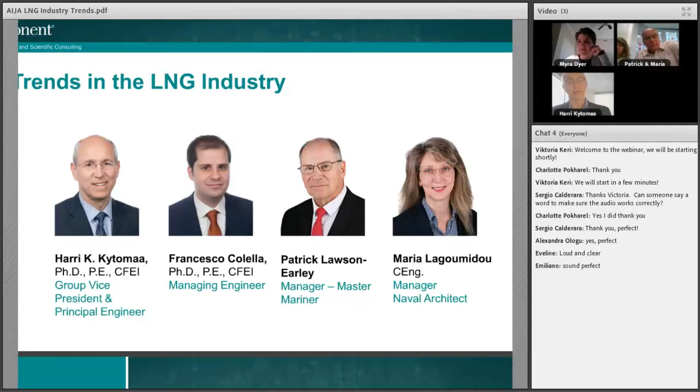So my name is Harri Kytomaa, as you heard, and I'll be kicking this off, and then Patrick and Maria will be speaking just after me. So again, thank you to AIJA for hosting us today and allowing us to give this presentation. And what I'll be talking about really is the rather exciting activity that's going on globally with liquefied natural gas.

So to kick us off, let me just address a simple question as to what liquefied natural gas is. So natural gas is typically 85% methane. It has higher molecular weight constituents like ethane and so on. It's produced either directly from gas reservoirs or as an associated gas in the normal production of crude oil. So when crude oil is produced, there is also natural gas dissolved in it that is a byproduct of crude oil production. So methane is CH4. That's the molecular structure of methane.

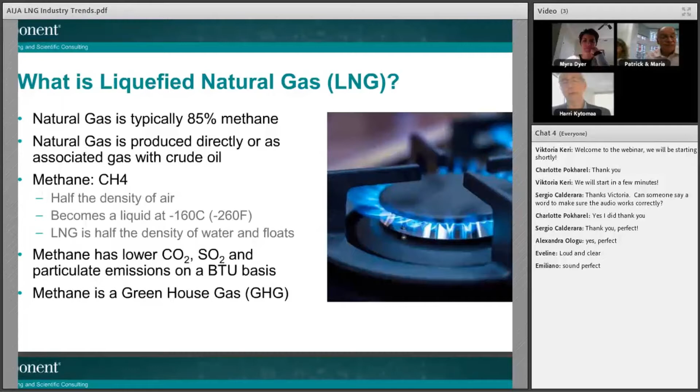Under normal conditions in the atmosphere, it has half the density of air, and it becomes a liquid at a temperature of minus 160 degrees Celsius or minus 260 Fahrenheit. As a liquid, it's about half the density of water. So if you spill LNG on water, it'll float on water. And that's relevant from the standpoint of safety issues that one has to be concerned with.

One of the great benefits, and that's really driving a lot of what's going on in the world, is that methane puts out on a per energy basis much less carbon dioxide, approximately half, for example, of what coal would put out, and also doesn't emit any sulfur dioxide, nor does it emit particulate materials when it is burned. So these environmental advantages have been driving very strongly what's going on in China, and we'll get into that a little bit more. But specifically, there's a big push in the last 3 years under the Chinese Blue Sky Initiative to replace the combustion of coal with the combustion of natural gas.

But methane itself is actually a potent greenhouse gas. It's about 20 to 30 times more potent than carbon dioxide. And so when it is vented into the atmosphere, it's a problem.

So the industry, while there are a great many environmental benefits associated with methane that I just described, venting or fugitive emissions associated with methane is going to be a great area of focus from a standpoint of ensuring, let's say, the environmental friendliness of the use of methane.

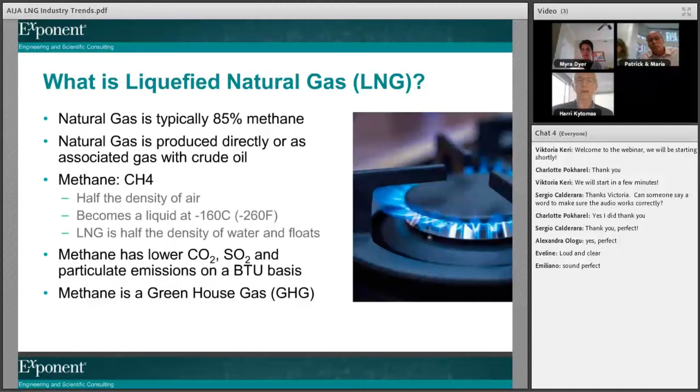So, what does the infrastructure look like? The natural gas is produced either on land or offshore. So you can see in the far right an onshore production rig, as well as here, if you can see my cursor, an offshore production platform.

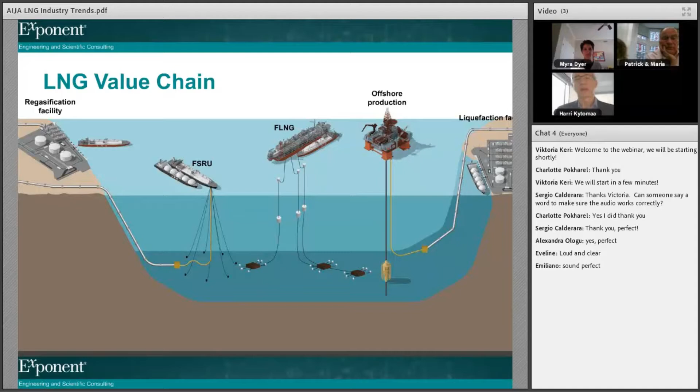The gas is produced, and then using pipelines, it is sent to a gas treatment facility. The gas treatment facility removes hydrogen sulfides, water, as well as natural gas liquids like ethane, propane, butane, and so on. And once the gas has been treated, it goes to a liquefaction facility that you see over here.

The liquefaction facility is really a large refrigeration plant. I'll go into some detail about that a little bit later. The liquefied natural gas is produced as a liquid, it's stored in tanks, and then offloaded onto ships, and the ships go off to market, like, for example, to the regasification facility in the far left over here.

Other exciting things are happening in the industry. In fact, for the first time in 2019, we now have what are known as floating LNG or FPSO, floating production, storage, and offloading facilities, like the very large structure that you see over here. And these are, as the name suggests, floating facilities that do everything that an onshore facility does, but offshore, to monetize stranded resources offshore.

And the way an FLNG facility operates is a ship will come to the side of it and then transfer the LNG over to the ship, and the ship will go off to market. And so the production of LNG is done with these FLNG systems, very complex systems that are now emerging in the marketplace.

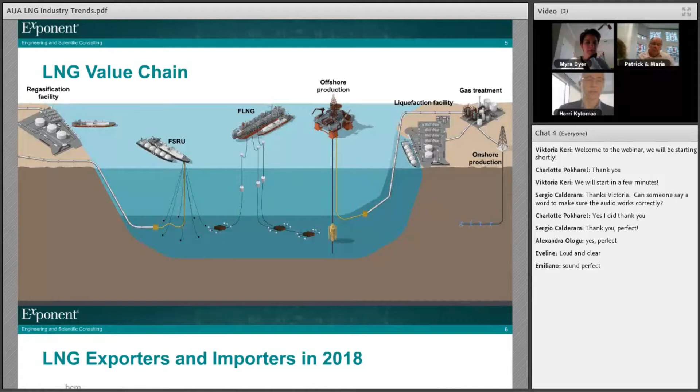There are also floating storage and regas units, and these have been around actually for a good 15 years. What these are is facilities, ships typically, that will store LNG and allow the regasification of the LNG so that it can be introduced into the network of gas pipelines at the market end of things. And so you can see here the FSRU is connected to a pipeline that then delivers gas in the far left of this image.

So where is all of this going on? This is really a good graphic that summarizes the global situation today. The top 10 LNG exporters on the left rectangle in 2018 were Qatar and Australia. Now, what's interesting about this picture is that there's enormous activity right now in the United States and Russia. So what you're seeing really is a window into 2018. 2019 and the next few years ahead of us will actually begin to develop a different picture.

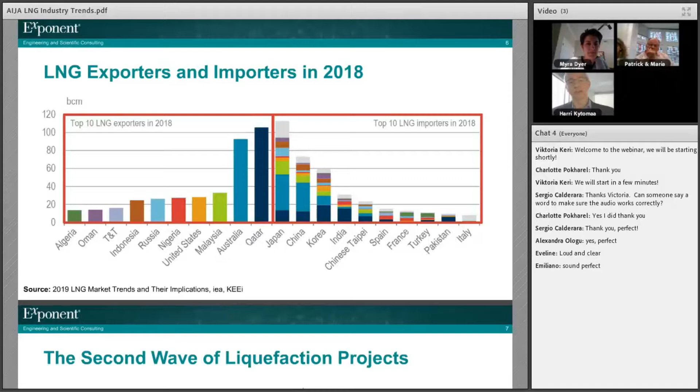The demand for LNG, or who is importing the LNG, in short, is Asia. You can see here Japan, China, and Korea. The interesting picture associated with the import of LNG is that China is becoming a big player and only just recently overcame Korea. Korea is now in third place in 2018 as an importer. And what's going on in China and the aggressive development of the import infrastructure is really going to continue to change this picture, as you'll see.

So if you look at liquefaction projects, these are the export projects, and who is doing what, I'll focus your attention first on the right-hand side. You can see that there are really two major peaks. This slide on the right shows you the export capacity that's coming online by year. And you can see that in the first peak over here, you have the light blue, so there's Qatar.

So essentially in the first decade of this millennium, Qatar developed a major infrastructure, and also Africa was coming online in red. Now, in this particular decade, the second decade of this millennium, the big activity that you're seeing is first Australia, then Russia and the US. And so that's what's happening right now.

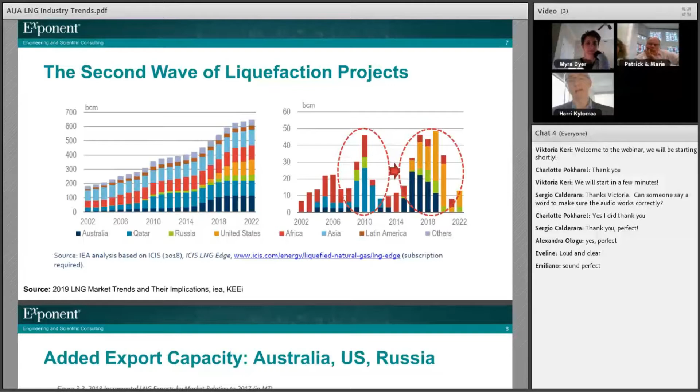So if you look at where we are today, we're in 2019 right here, and you can see that the United States has got a lot of infrastructure coming online this year and next year. I'll show you that. And Australia is at the tail end of its major push in development.

So if you look at the increment in 2018, just the increment in 2018 of the export capacity, you can see that Australia was the one that contributed the most, consistent with the prior chart, and then US and Russia contributed each around 8 million tons per year.

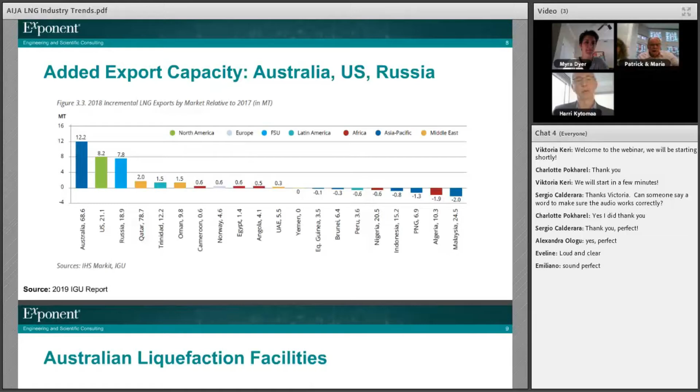Now, where are these facilities? So you can look at geographically where these are situated. So in Australia, here I'm showing all of the liquefaction projects. The two major projects in Australia are the Gorgon Chevron project and the Northwest Shelf, and each of these is around 15 million tons per annum, or MTPA.

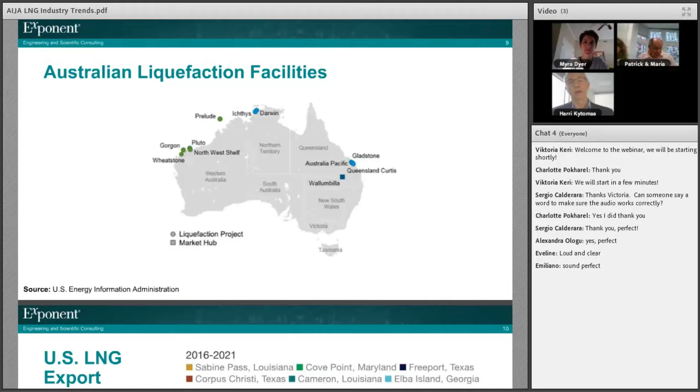Prelude is actually the first floating liquefaction facility, and you see it over here. It came online this summer, delivering its first shipment in June 2019, and there are more FLNG projects on the horizon today.

In the US, the picture is actually really quite interesting. This is, again, the capacity that's come online. And so you can see in 2019, there's a steep rise. First in 2019, we've seen a continuation of the Sabine Pass liquefaction trains. So the fifth one just came online about a year ago. And then you're seeing Corpus Christi, Cameron, Freeport coming online.

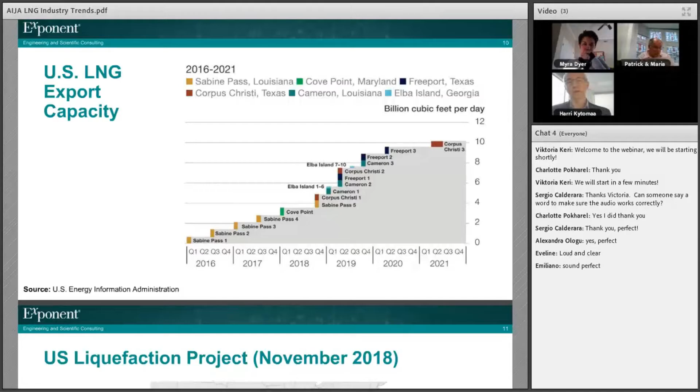And so really the picture that's emerging in the US is twofold. One, big push in 2019. 2020, next year, promises a very large number of projects, up to about 100 million tons per annum, going to final investment decisions, FID, which means that there's a potential for the liquefaction capacity in the US to actually double in the next 5 years or so. But it's a very dynamic marketplace right now, so yet to be seen exactly how that transpires.

Most of the capacity in the US today is in the Gulf of Mexico. You can see here Sabine Pass, Cameron, Freeport, Corpus Christi. There are projects worth mentioning that are developing right now on the West Coast. These are noteworthy because the greatest demand, as you saw, is in China or Asia in general, and the distance from the West Coast to Asia is considerably shorter, about 10 days shorter than from the Gulf of Mexico. I'll say a few words about that in a little bit.

Also noteworthy is the fact that there are about half a dozen projects that make up the opportunity for doubling the North American capacity in the next 5 years or so.

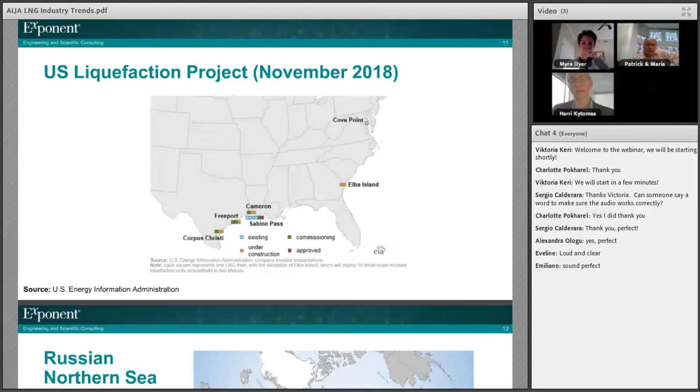Now, Russia is interesting. Yamal LNG has been online now for a couple of years. What's unique about the two developing projects, the Yamal LNG and Arctic LNG II in Russia, is that these are on the Arctic Ocean, and they have required the development of more sophisticated LNG ships, specifically ones that have the ability to operate in ice and the ability to break ice.

As I pointed out, the greatest demand is in Asia. The demand is less in Europe, and so right now the goal for these Russian projects is primarily to sail via the Russian Northern Sea route that you can see here through ice to the Asian market, and in the wintertime to cater to Europe. And economically, the greater demand market actually fetches a higher price. So there's a real drive for the Russian LNG to cater to the Asian market.

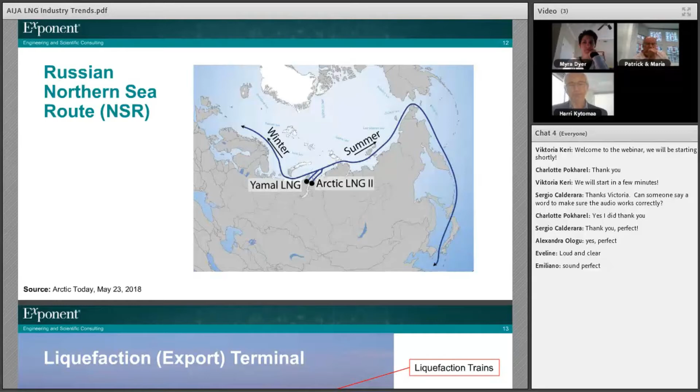So what does a liquefaction facility look like? The liquefaction facility from a technical standpoint is really a thermodynamic cycle that is similar in character to your refrigerator at home. A refrigerator in your home has a compressor that compresses the refrigerant, and that's the piece of equipment that sometimes makes some noise in your fridge. In compressing the refrigerant, the refrigerant is heated up. So the second important function of the refrigerator is to reject heat. In the back of your fridge, you've got these coils that heat up and reject heat into your kitchen.

And so a liquefaction facility has to have a large compression capacity, and that is done using compressors that are driven by gas turbines, or essentially modified aircraft engines. And the typical appearance of a liquefaction facility will reveal that you have a lot of heat exchangers to reject the heat that is created.

The compressed and cooled gases then go through an expansion valve that causes the refrigerant to cool significantly. That then enters a heat exchanger. In your fridge, that's the cold plate on the inside of your fridge, and at a liquefaction facility, that's called the cold box. The cold box is really an important piece of technology associated with liquefaction terminals. The refrigerant then cools the gas, and the gas is brought down to a temperature of around minus 160 degrees Celsius, making it a liquid.

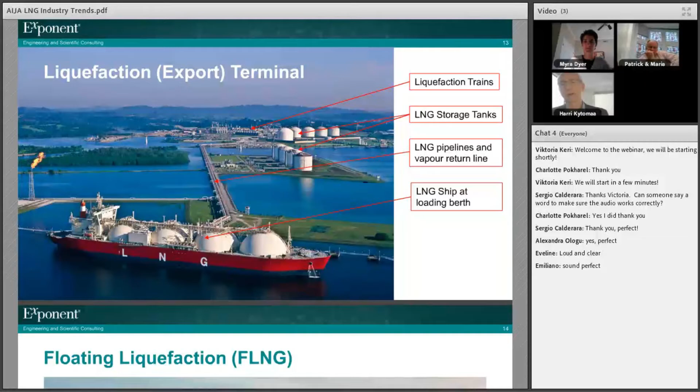Other players in this liquefaction technology include the Prico. That's probably the oldest, and typically supplied by Black & Veatch, as well as the ConocoPhillips optimized cascade process. And so you're seeing those three in the marketplace, and there are new ones that are coming online as the world continues to develop this capacity.

So here is a picture of the Prelude floating liquefaction facility. And what's interesting about the Prelude is that, well, first it's floating, so it operates offshore. And so the processes have to be able to accommodate wave actions and things like this that you do not experience onshore. And in essence, the facility or the platform has to accommodate all of the processes ranging from the production of the gas to treatment all the way to liquefaction in about a quarter of the footprint. So you can imagine a lot of the systems are packed very closely on this very large ship.

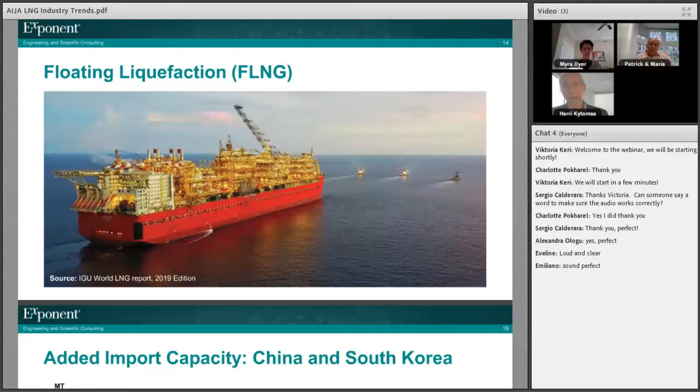The dimension of the ship is about 0.5 kilometer by 75 meters or so. So it's absolutely enormous. And you can expect to see more facilities like this developing in the next 5 to 10 years.

Let me skip to China. So now I'm sort of swinging over to receiving terminals or regasification terminals. So in the last 3 years, there's been an enormous push in China to develop the import infrastructure to receive liquefied natural gas. And the reason for this has been primarily to replace coal that has been a great source of pollution in China with natural gas, with its benefits associated with clean combustion.

The interesting thing about China is that not only are they developing an enormous import infrastructure, but they're also investing in the liquefaction capacity globally. So they have been, for example, minority investors in the Russian projects that I described to you. They are a player in Shell's LNG Canada project, and others, including Australia. So really, China is a major player, and this is helping them secure the LNG supply, not just building the infrastructure to import.

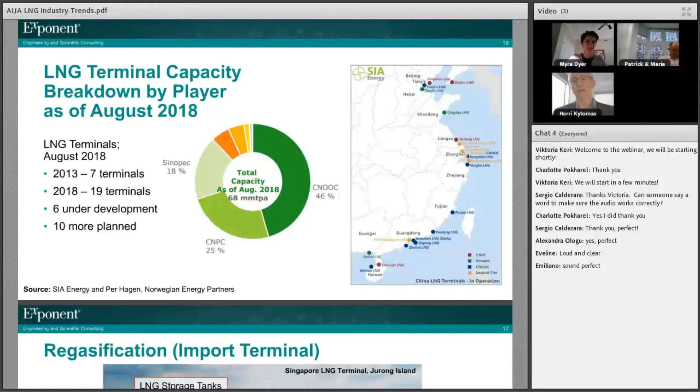So a regasification terminal, here's an image of a regasification terminal, is considerably simpler than a liquefaction facility. Essentially, the primary components of a regas terminal are the ability to accommodate the LNG carrier that you can see here, to offload the LNG into the tanks that you see, and then to vaporize it. Essentially, the vaporization involves adding heat to the liquid so that it is gasified and then injected into the network of pipelines.

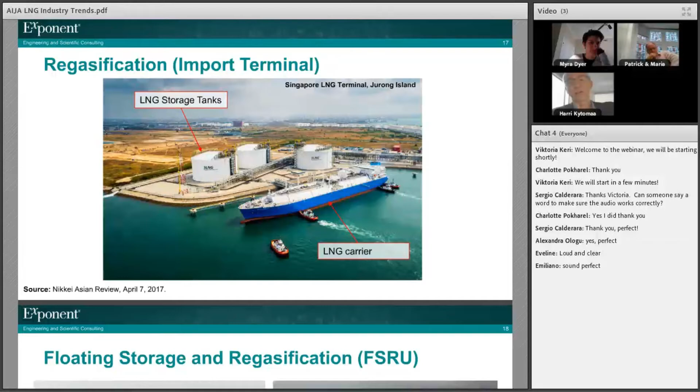Another important point associated with the regasification is that each of these terminals will have a fairly tight specification regarding the heating value as described through what's called the Wobbe index, to ensure that it satisfies the marketplace. And so it satisfies the required narrow range of combustion characteristics, for example, that are important in gas turbines that help generate power. And so for that, nitrogen is often introduced into the stream to make sure that the specs are met.

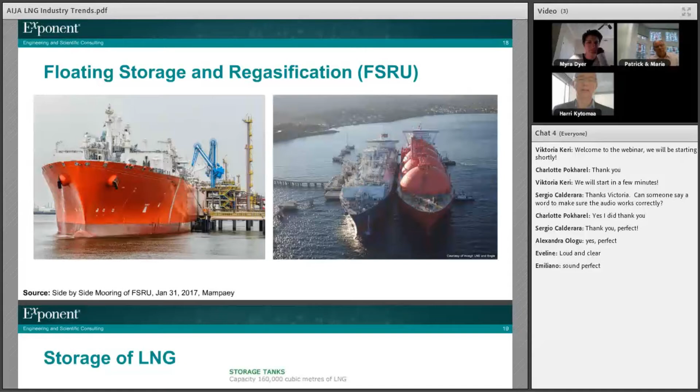Now, I mentioned earlier floating storage and regasification units, and so these really have been around for about 15 years, and what they are is primarily ships. In fact, many FSRUs are repurposed LNG ships, but they also have the capability of regasifying the LNG. And these are either floating just offshore and connect to an infrastructure of gas distribution pipelines, or at a berth, as you can see, the white ship right here in the image on the right.

LNG is actually a commodity that is considerably different from things like gasoline or crude oil or other fuels, in that it is stored at cryogenic temperatures, minus 160 degrees C, and it is stored in tanks, whether onshore or on ships. These tanks have to be insulated with fairly sophisticated insulation systems, and no insulation system is perfect in the sense that it will leak some heat into the tank, and so that results in what's called boil-off gas. And all LNG storage systems will have boil-off gas, and you have to have strategies to manage that.

And what that means is that you cannot store LNG passively in a tank without having to release some methane into the atmosphere, if you were to do so. And as I mentioned before, methane actually is a potent greenhouse gas, and so for that reason and other economic reasons as well, you need to take measures to ensure that something is done with the boil-off gas. And boil-off gas can be reliquefied; it can be used in engines, for example, on ships, as fuel.

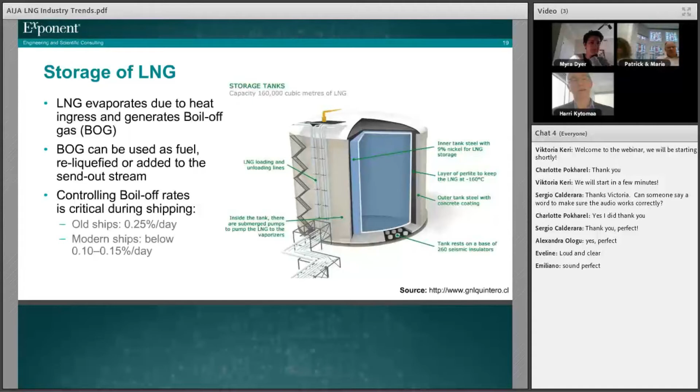And as the shipping fleet increases in size, and the technology continues to develop, we're seeing now better and better insulation technologies on ships as well as onshore. And so you can see here that the boil-off gas rate in older ships is 0.25% per day. Modern ships are considerably lower than that. In fact, some are below 0.1% per day.

And there are a couple of factors here. So obviously, just simply the geographical distance, but also the fact that the Panama Canal is a little bit of a bottleneck for the transportation of LNG from the Gulf of Mexico to Asia. And the standard route is to go through the Panama Canal and then sail across the Pacific over to Asia.

There's been a recent expansion of the Panama Canal, and so now they can accommodate more than one ship per day. But as the LNG liquefaction capacity increases, we expect that will become more of a bottleneck than it is today.

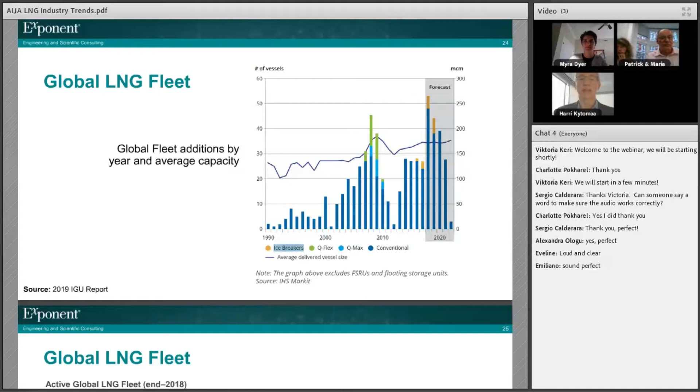So actually, let me go back to that particular slide. So based on this, you can see that about half of the population of the ships are less than 10 years old, and half of the population are probably more than 10 years old, just based on when these came on board, and that is reflected in this particular histogram. So here you can see the total fleet represented.

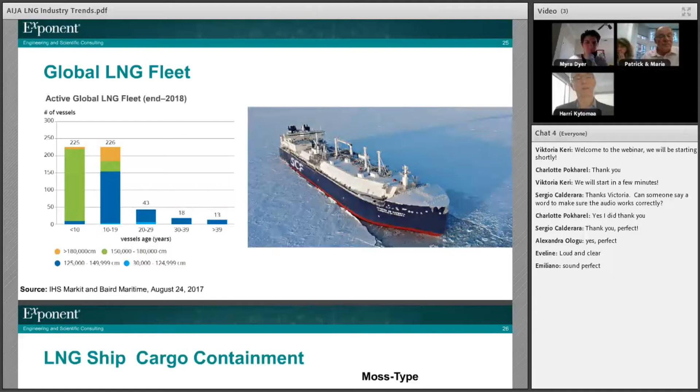The total fleet is just over 500 vessels globally, and the ones that are less than 10 years old are mostly ones that can sail through the Panama Canal, so between 150 and 180,000 cubic meters in capacity, and the ones that are a little bit older than 10 years old. So these are the ones that show up in orange over here. These are the ones that were associated with the Qatari projects that are in operation today.

So the interior of these ships looks simply fascinating. There are really two types of ships primarily that are in use today. 2/3 of the fleet of 500 or so have membrane tanks, like I show on the left over here, and about 1/3 are these Moss type tanks, and these differ considerably in their design and use of materials.

Really, the biggest differences are that the Moss type is made out of one large aluminum or aluminium shell that ranges in thickness between 1 and 6 inches, so ranging from 2.5 centimeters to about 15 centimeters in thickness, while the membrane type is actually contained using a membrane that is of the order of 1.5 millimeters and made out of Invar or 304 stainless steel.

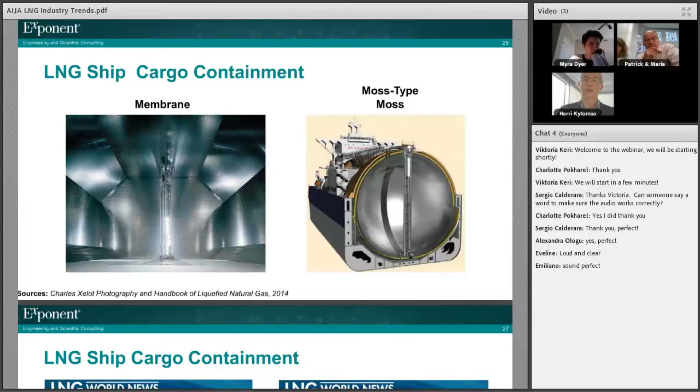And the big design difference between membrane and Moss types is that the hull on the membrane type ships actually supports the weight of the LNG, so the weight is not supported by the membrane or the secondary membrane, but rather the forces are transmitted directly to the hull, while the Moss type sphere is actually self-supporting. It has its own structure that supports the sphere.

One of the interesting things that's going on in the industry today is that really over the last 2 decades, the leaders in the manufacturing of the fleet of LNG tankers that we have is primarily Korea, and there are 3 major shipyards in Korea: Daewoo, Hyundai, and Samsung Heavy Industries, and they today command the majority of the order book for new builds of over 100 ships approximately.

And to put things in context for you, the cost of a new build is around 200 million, and the majority of these ships are membrane ships, and the technology associated with the membrane is owned by one company, GTT. This is a French company called Gaz Transport Technigaz, and they charge approximately 5% of the cost of a ship to allow these shipyards to build and use, essentially purchase a license, and that's about $10 million a ship.

So with that, let me pass the baton to my colleague Patrick, who's going to tell us about LNG Marine Terminals. So Patrick. Okay, thank you very much, Harri.

Taking it over here, the LNG Marine Terminal, as you can see in the picture, is the interface between the ship and the shore. Basically the same for both liquefaction and regasification, and the important thing with all LNG Marine Terminals is that the ship and the terminal have to be compatible. So there are a number of industry guidelines and recommendations to ensure that the ship and the terminal match, and all the ships are constructed to match all the terminals. An organization called SIGTTO, the Society of International Gas Tanker and Terminal Operators, provides most of that regulatory information so that all the ships fit all the terminals.

And also, of course, the marine terminal is part of a port, so there has to be other infrastructure. There have to be tugs, pilots, channels, traffic arrangements to ensure the LNG ship is not hindered when it's entering port. Things of this nature. So having an LNG terminal in a port can have quite an impact on the port operations.

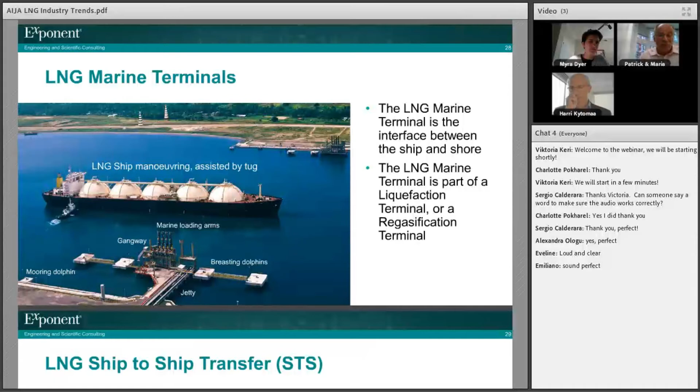And the other alternative is ship-to-ship transfer of the LNG. This is where two ships will moor alongside each other offshore and transfer cargo one to the other. Originally, this was really an emergency procedure if a ship broke down or similar. But with the Arctic LNG projects that Harri was talking about earlier, it's now become quite normal.

The new ice-breaking ships, although they're perfectly capable of trading worldwide, it's not economic. They don't have an efficient hull shape for long ocean voyages as they are icebreakers. So it is better from an economic and operational point of view to bring the ships out of the Arctic to a suitable location, bring a conventional LNG ship alongside and transfer the cargo for the conventional ship to take it off to market.

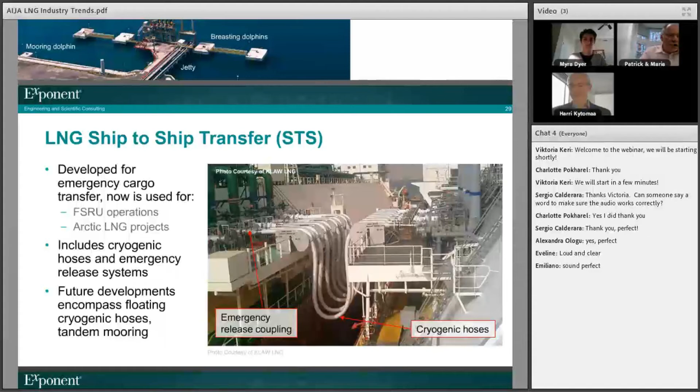The other reason is that the Arctic LNG fleet is quite small, and if the ship was off on a long voyage somewhere else, there wouldn't be a ship to load the next cargo. So the system is becoming quite routine now. There have been 83 STS operations on the Arctic project so far this year. So that's a fair number of cargoes. And the system will move further, particularly with small-scale LNG, which I will come to later, as that will often be a large ship transferring cargoes to several smaller ships.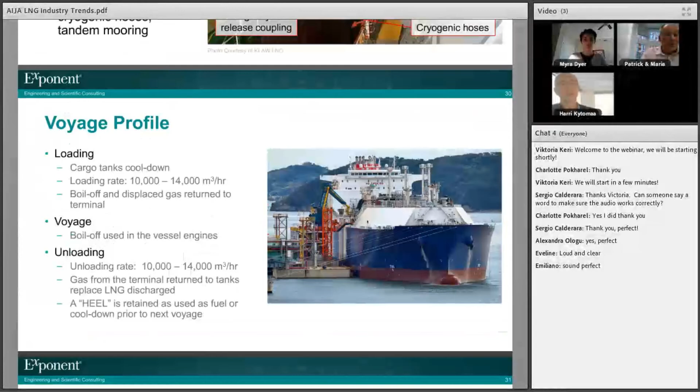An LNG ship voyage is basically quite simple, but has some factors which are unique to LNG. The main one being that because the LNG is cryogenic, the cargo tanks must be cooled down before the cargo is loaded to at least minus 100 Celsius in order to avoid any problems when you start loading the liquid. And at a loading rate of 10,000 to 14,000 cubic meters per hour, which varies with the terminal and the ship but is usually within that range, the ship will be alongside for about 24 hours in port, with a loading period of 12 to 16 hours.

And during that loading period, obviously, the tanks, when the ship arrives, will be full of natural gas from the last voyage, and loading the cargo, pouring liquid into a tank, will make that cargo circulate and will generate even further gas, which must go somewhere, and you can't vent that to atmosphere, as we've said previously, so it's returned to the terminal where it is handled by the various systems.

During the voyage, there will again be some losses due to heat ingress, although the tanks are exceedingly well insulated, and as Harri said earlier, the technology's improved a lot over the years, but also the engines have become a lot more efficient, so there are less losses. But LNG is unique in that during the voyage, the ship consumes some of the cargo as fuel. This is calculated and taken into account in the commercial agreements and everything else, but is something that is slightly unique to LNG operations.

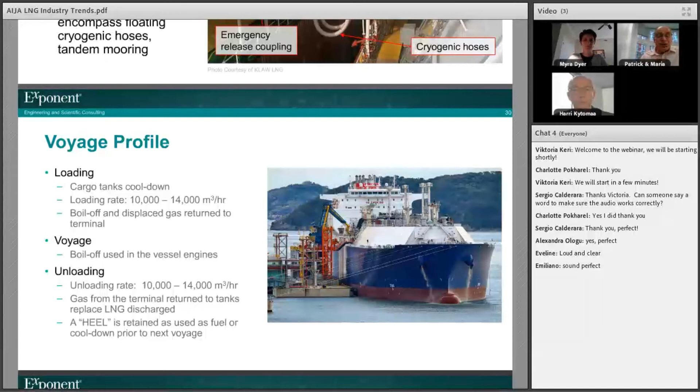On a conventional LNG ship, the ship will retain a small portion of the cargo at the end of unloading. This is to allow them to use some of that small amount of cargo as fuel on the way back to the loading terminal, but also to enable them to have enough cryogenic liquid on the ship to cool the ship down prior to starting loading.

The LNG ships will be chartered. Normally, a ship owner will place an order with a shipyard to construct a ship. As Harri said, a lot of these will be placed either as part of a project or, more usually nowadays, on the basis that the ship owner knows there's a lot of projects coming up and will start placing orders for ships so that he can then bid for long-term contracts from the companies which are planning to construct the new export terminals.

This was due to some of the new liquefaction, particularly the ones in the USA, coming on stream when the ships being constructed to serve them weren't all available, and thus obviously this introduced a premium, particularly as the US terminals are further from the market than some of the other terminals, and therefore you need more ships to service the same route.

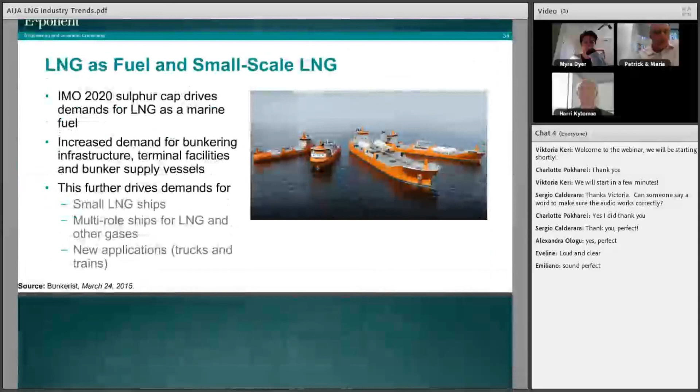And finally, LNG, as we've said, there are a large number of new liquefaction projects. China and other parts of the world are taking in more and more LNG to fuel natural gas because of its green credentials, if I can call it that.

But also there is a lot of small scale LNG now, which is a new and increasing situation. The regulations for ships' fuel are changing in 2020, and there will be a cap on how much sulfur can be in ships' fuel. And a lot of owners are changing over or constructing new ships so that they can burn liquefied natural gas as a fuel on the ship.

This is driving small-scale storage facilities, small ships to supply the larger ships with LNG, etc. And also LNG is being used as a fuel for trucks, for trains. It's being transported by train. There are many and myriad uses, and new containment systems, new small ships, etc.